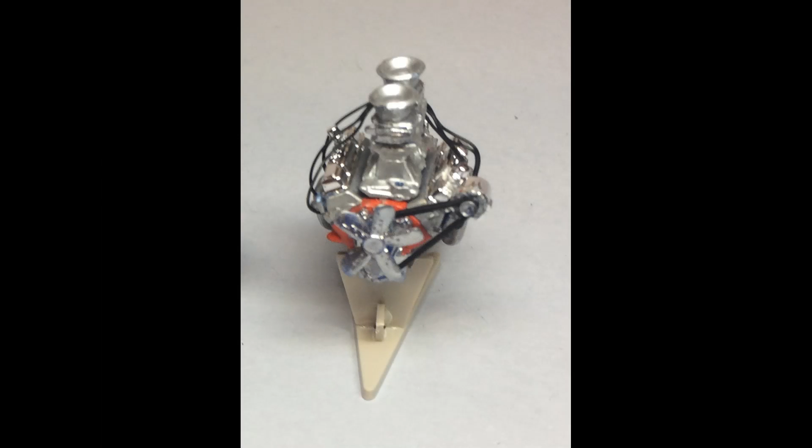Here's a look at the completed engine with the engine wiring in place and the velos sticking out the top there. It's a pretty impressive look.

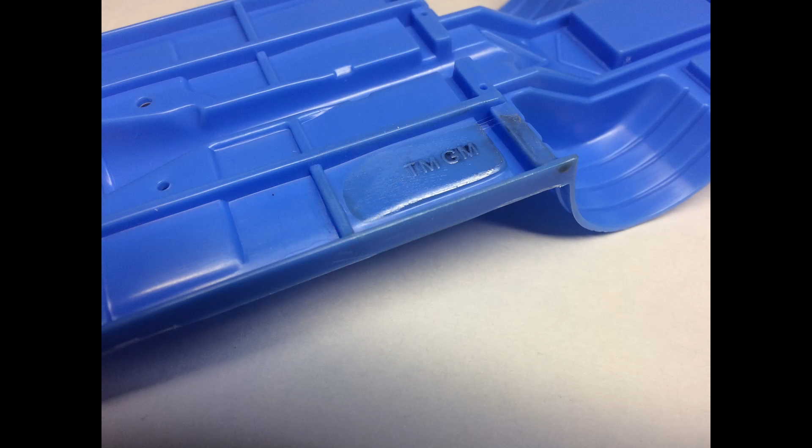Next we'll do a little work on the chassis and frame. The frame's molded in there, and it should be painted black, but the panels are an aluminum color. If you are painting a contest model, you're going to want to remove the GM trademark script from the bottom of the chassis.

Next we'll be adding the springs and things like that, the control arm and cross members, these panels that you see here for the front end. Here you see the fender walls and the control arms in place up front on the right side there on top of the frame rail.

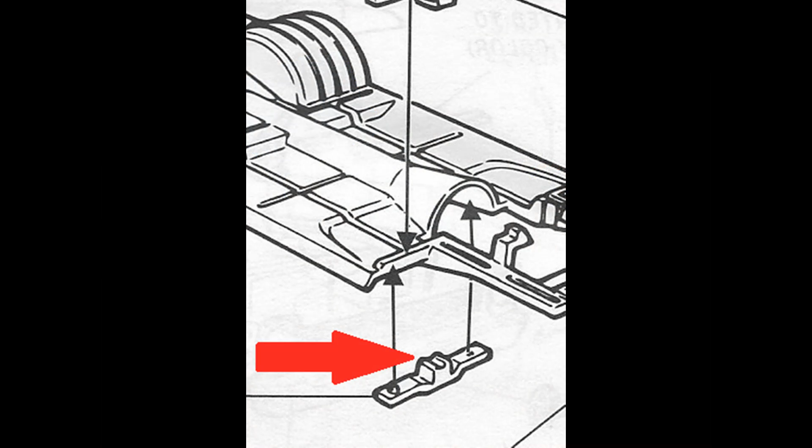This next step, we're going to add the steering box and the master cylinder, as well as mount the engine. Now back in step 4, it shows us mounting the cross member, but I found that the transmission cross member should be left off until the engine is in place.

It interferes with the installation of the engine, so go ahead and take it off. As you see here, the red arrows indicate it's been removed. After the engine is in place on the mounts, go ahead and reinstall it.

Next we'll add the parts for the radiator, the support in the radiator and the hose, as well as the upper shock mounts to the tops of the fenders.

Here you see the parts in place, and if you're wondering, the radiator is aluminum because that, in fact, it provides for better cooling without having it painted.

And now we're going to finish the suspension. You can see those suspension parts, drive shaft, etc., semi-gloss black, and the others are aluminum.

Use a small drill, and you can drill out the ends of the exhaust pipes for more realism, and then add a little black to the hole you just drilled.

Here you see that the exhaust pipes have been glued to the ends of the headers. I found out that the metal axle supplied with the kit is a bit too short, so I used one from my spares box, but you can cut one from music wire, or just use some plastic rod stock at about 1/16 inch in diameter.

Again, for realism, I drilled out the holes in the wheels. They're pretty nice looking, except that they're closed off—those holes are not open. You could paint them, but I just used a drill and drilled them out. Then I painted the wheel backs black and added it to the chrome parts. Remember to remove chrome and paint when you want to glue parts together.

So here you see the hole in the hood, the etched hole, so that you can remove that. Use the backside of a hobby blade and scribe it until it cuts through. You're also going to find that at the back end you may need to extend that a little bit to make sure that the injectors will clear that hole in the hood.

So with the hole in the hood nicely contoured and cut out, we're going to assemble the scoop, and it's a two-piece unit, and of course it'll need to be smoothed along the longitudinal line there to make it look nice. Then we're going to install that on top of the hood into place later on.

Give the body a couple of light coats of light gray primer. After that is done, the body was painted with a light One-Shot brand 124L orange. Then after three coats of that light paint and a final wet coat, I used a light mist of number 100L vermilion and fogged the lower part of the body for some emphasis.

Now the graphics on the side are kind of dated—they came from the original kit actually. So once that was all in position, I pushed the interior into place on the body assembly and then added that to the completed chassis.

So here is the trim, the bumper there, and the taillights, and they were painted stoplight red and white for the backup lights there, and then attached to the vehicle. You can see the parts are in place here, and they look pretty nice and clean.